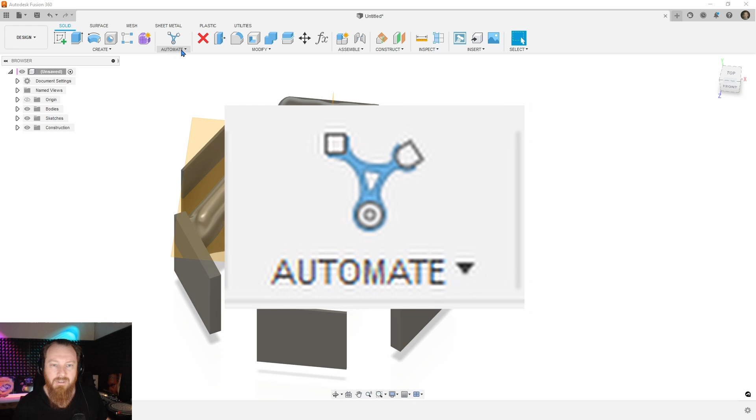In this video we're going to have a look at a new feature. Well, it's not necessarily new, but it's more available, more accessible. The Automate in Fusion 360 is now available as like a free beta trial thing. So it's in the toolbar, you just click on that, and I've already accepted it, but you can just accept to be part of their trial program.

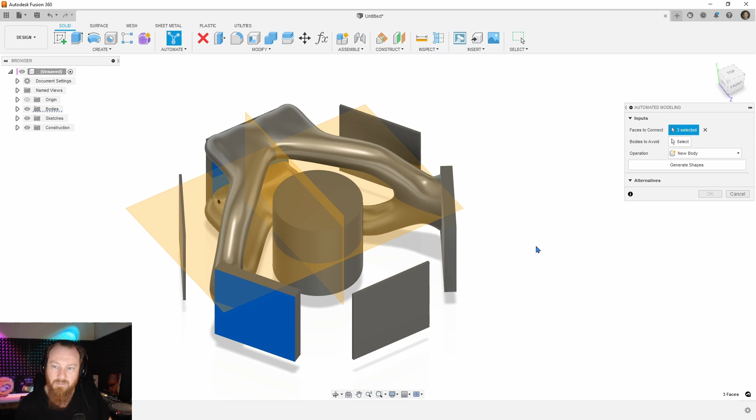And here's one I prepared earlier. So yeah, this weird organic-ish looking shape joining these three bodies here was one of the options that I was presented with. So of course, as soon as I get a new feature, I want to try and test its limits. And so what I'm going to do is I've got one body there, and now I'm going to use this organic-ish body that it's created as my avoid feature, or my, what is it, avoid? Yeah, bodies to avoid. So yeah, let's test that out.

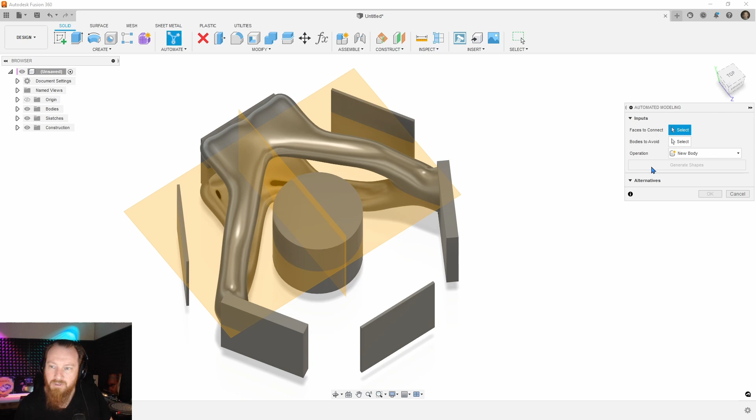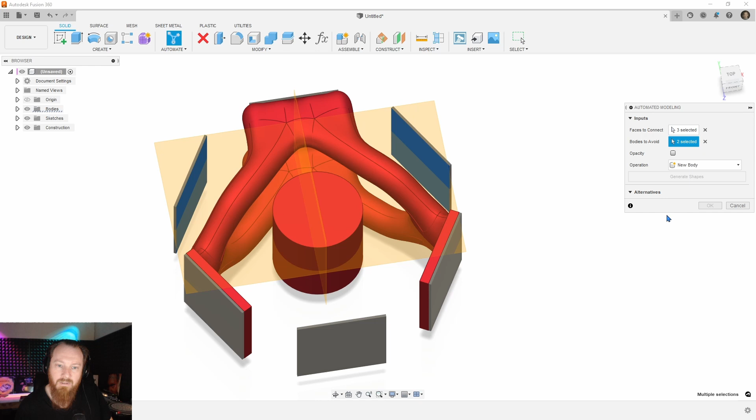So got faces to connect, that one, and that one, and bodies to avoid. So on the first one I just had the cylinder there, and that's how that first L-shaped one got created. So generate shapes. Now this takes a little while. While that's generating, I will be quiet and we'll do a time lapse, and you'll be able to see them generate down here on the side.

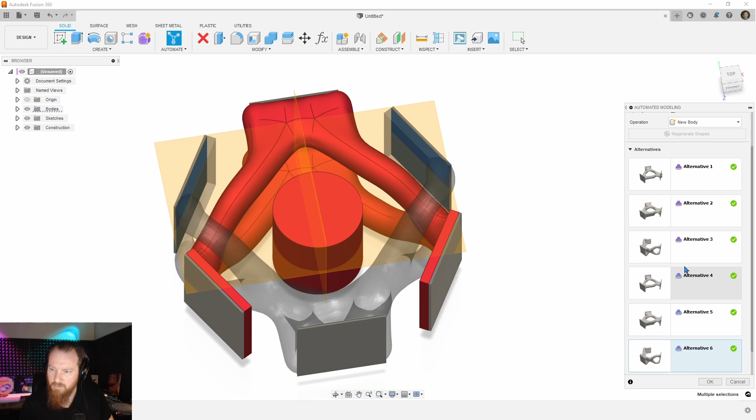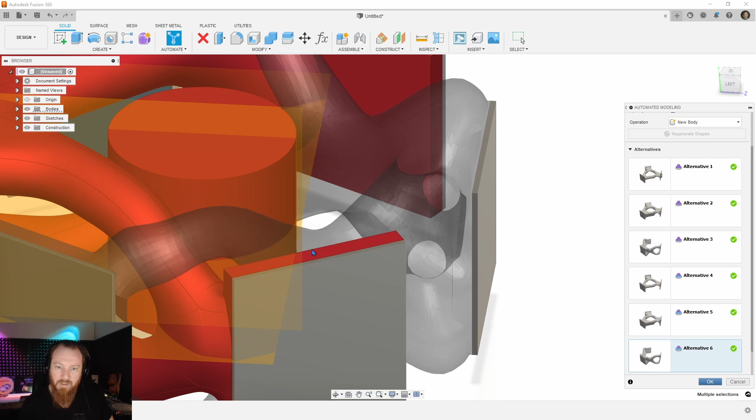Okay, so they're all done. It's interesting, there's a couple here that are similar, and it's actually interesting as well that they're similar to the original one. So if we look at alternative 6, that first one I did was actually alternative 6 in the first batch as well. But in this case alternative 6 and alternative 3 are similar. Looks like 6 might be a bit leaner in mass. It's got some voids in there. It's interesting. Alright, we'll just say okay for now with that. Literally just playing around with this for the first time and seeing what it's all about.

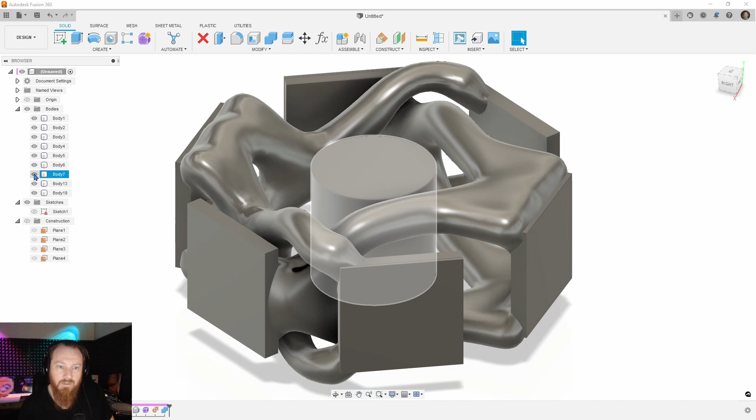Okay, so that was a reasonably quick process, and I'll turn off these origins. I think that's the constructions. There we go. Yeah, how cool is that? That's amazing. Alright, I'm going to turn off that middle body as well. Which one was that? That'll be number 7, I guess. There we go. And yeah, I mean, that's pretty amazing. It's pretty cool.

I don't really have much more to say. You can see for yourself how much of a time-saving awesome tool that is, and well done to Fusion 360 for giving us a free usage of that in the toolbar. They did actually have a free trial thing going with all of their plugins a while back. I saw a notification for that.

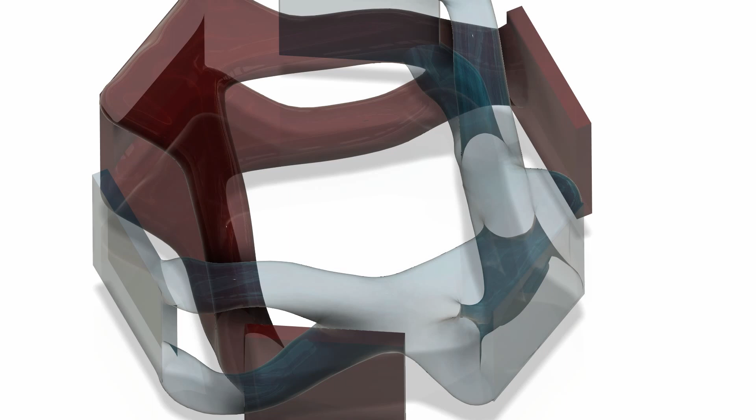So I'll leave it there. Not too formal for this one, but I hope you found that useful and entertaining. Highly recommend playing with that tool and see what you can come up with.